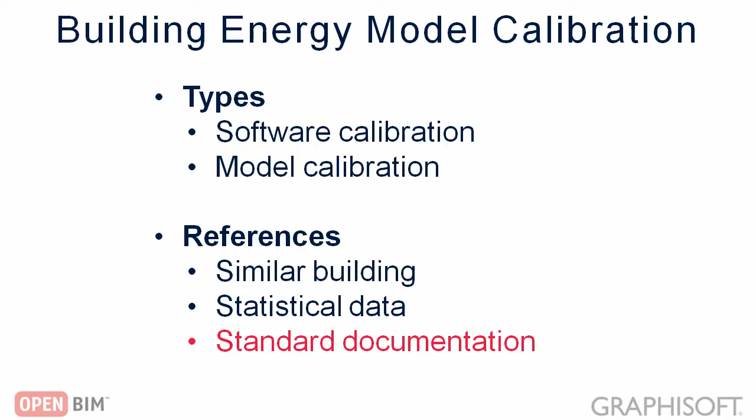A model from a building energy simulation standard can also be used as a reference building to perform the calibration of your design. In this presentation, we will use one of the ASHRAE 140 standard building models to show you how to calibrate a building energy model, as well as demonstrate that EcoDesigner Star complies with the ASHRAE 140 standard.

The official name of the ASHRAE 140 standard is Standard Method of Test for the Evaluation of Building Energy Analysis Computer Programs. This is the internationally accepted validation procedure for high-end building energy performance analysis software. ASHRAE 140 is referenced by all significant green building rating standards, for example LEED, Green Star, BREEAM, CASBEE, DGNB, and Section J of the Building Code of Australia.

The ASHRAE 140 standard documentation contains over 100 various cases, architectural tests called building envelope tests, and building system tests for various heating, cooling, and ventilation system setups. If a computer application can correctly simulate all ASHRAE 140 test cases and provide appropriate results, then these simulation results are approved as a basis for a building energy performance rating as prescribed by LEED, BREEAM, Green Star, and others.

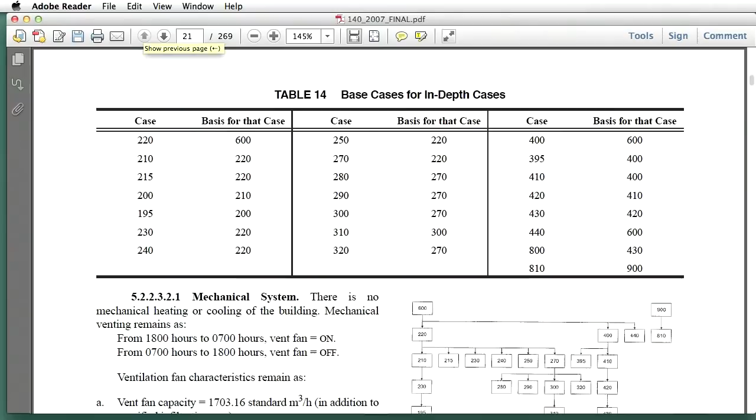All ASHRAE 140 test cases relate to one of the so-called base cases. For example, there are 2 envelope test base cases. These base cases are modified and listed as more complex subcases, which all originate from one of the base cases. All the energy scenarios described in the base cases, as well as in the subcases, must be properly simulated by the computer application in order to obtain approval and receive standard compliance certification.

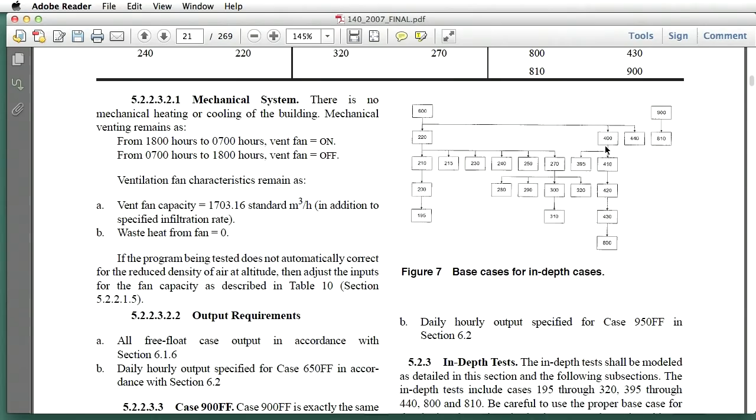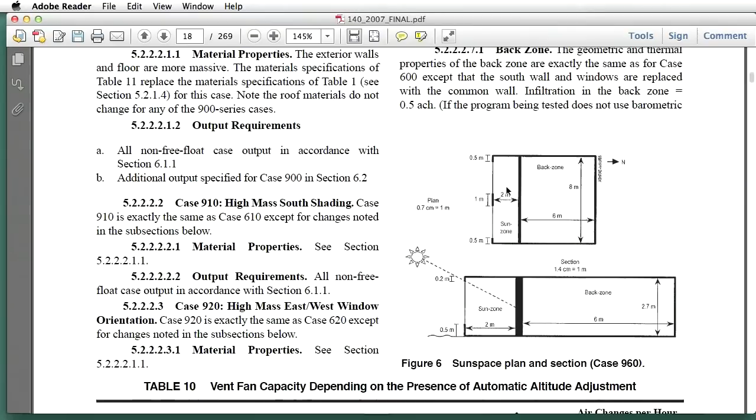In this example, we'll present one of the envelope tests of the ASHRAE 140 standard. This will be the so-called SunSpace test, and its case number is 960. Let's have a quick look at the description of this particular case first. The standard defines the detailed geometry of the building model on which the test must be run. Below, all the corresponding material properties are also listed in tables. In the case of the SunSpace test, 2 thermal blocks must be considered: a sun zone with a window and a back zone behind it.

The parameters defined in the ASHRAE 140 standard must be input into the software application precisely. After executing the energy simulation, the calculated results must meet the results defined in the standard. In the case of the SunSpace test, the following calculation results must be shown: total annual cooling and heating energy for the back zone, heating and cooling peak loads for the back zone, minimum, maximum, and annual mean temperatures in the sun zone. The back zone is a so-called conditioned space, and the sun zone is an unconditioned space. These terms will be explained shortly.

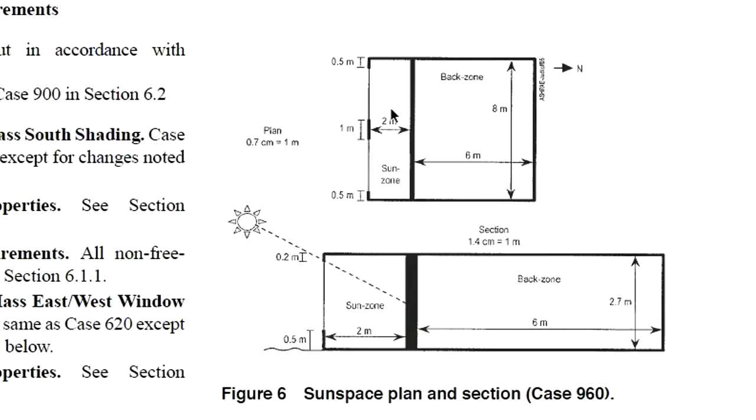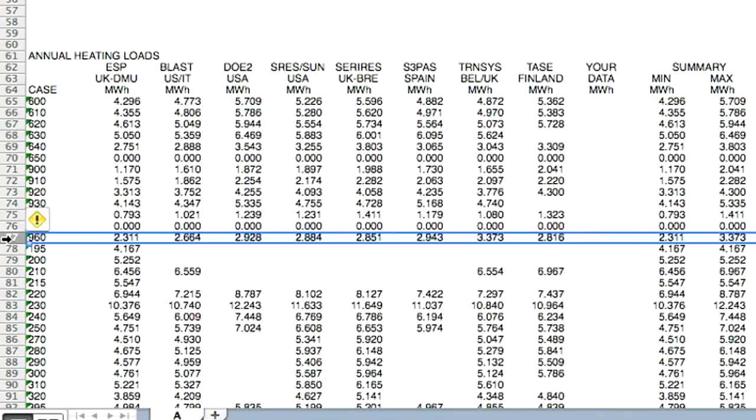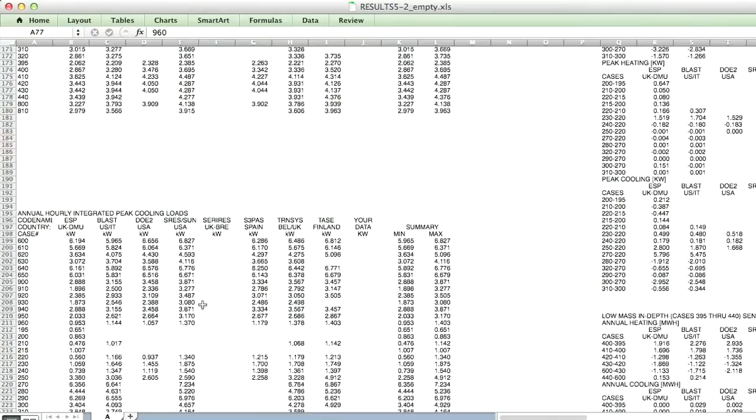The standard table contains the calculation results of other software applications for reference. The last 2 columns contain the minimum and maximum values as calculated by the other reference software. These 2 values define a range for the acceptable results. To be able to achieve standard compliance, the results calculated using the software application being tested must be within this range. There are additional tables for annual cooling loads, peak heating and cooling, and so on. All relevant calculation result data for each test case must be processed using the validation method described above.

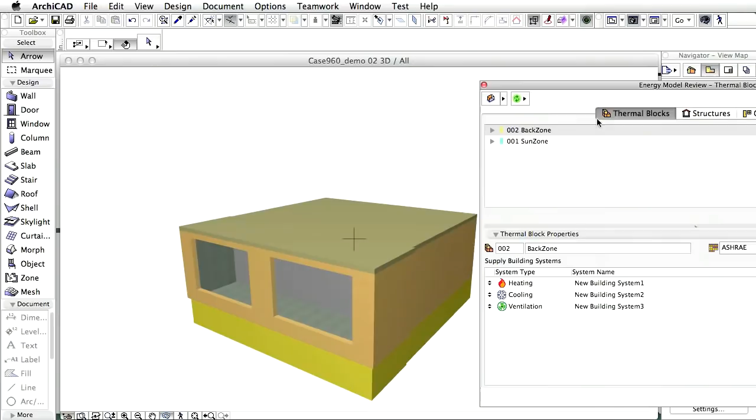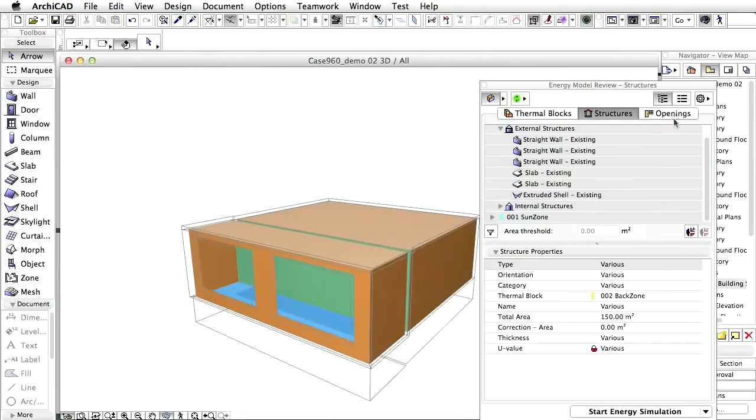Let's display the building model of case 960 of the ASHRAE 140 standard in ArchiCAD. The building model is pretty simple. It contains only 2 thermal blocks. The sun zone is a heavyweight construction, while the back zone is a lightweight structure. The Energy Model Review palette helps to visualize the 3D geometry, as well as all the energy-related characteristics of the building. The Thermal Blocks page of the palette represents the zoning of the energy model. The Structures page lists all the opaque structural elements with their relevant properties. The Openings page presents the energy-related characteristics of the fenestration.

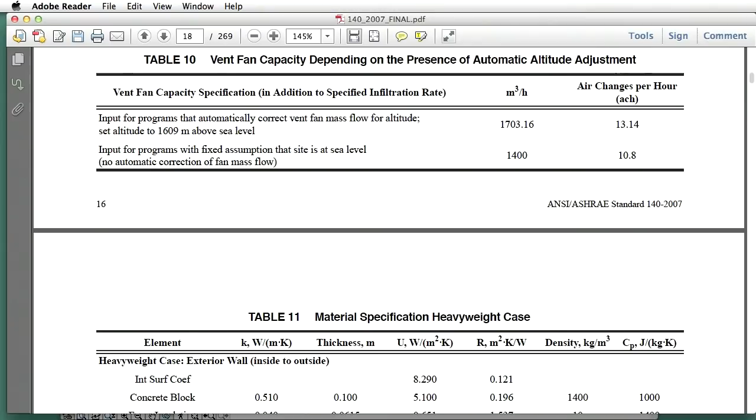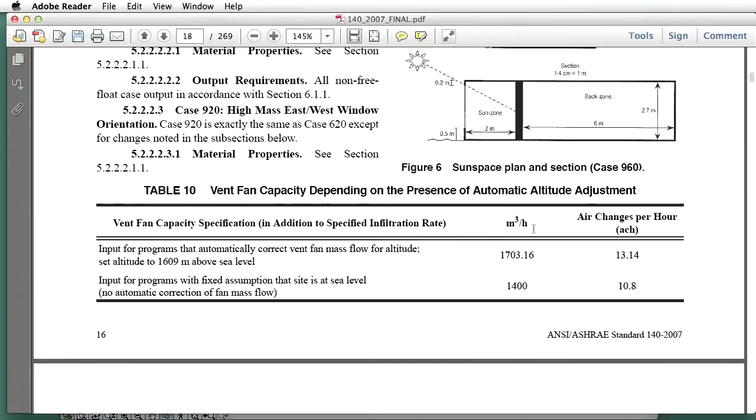Let's have a closer look at the specifications of the sun zone as defined by the ASHRAE 140 standard. Here you can see the geometry of the zone, while the following page describes the various structures' thermal properties. The names of the individual skins of the composite structural elements with their thickness, thermal conductivity, heat capacity, and density are all precisely defined in the standard. Using the advanced modeling tools of ArchiCAD, it was really quick and easy to create the building model according to the ASHRAE 140 standard specifications.

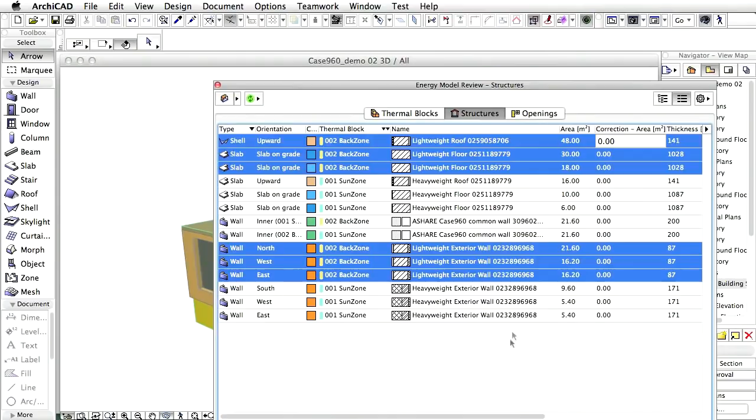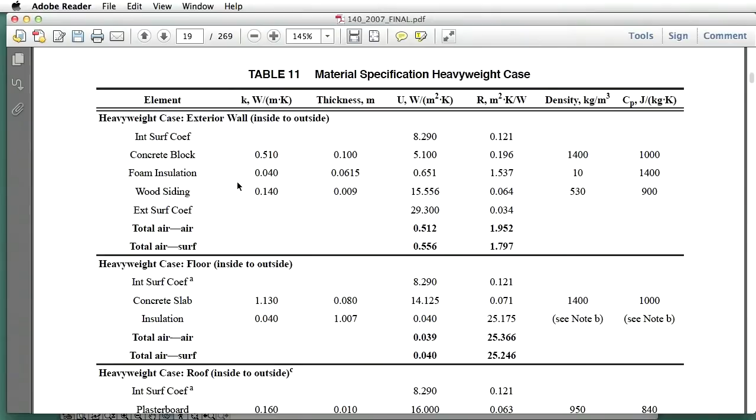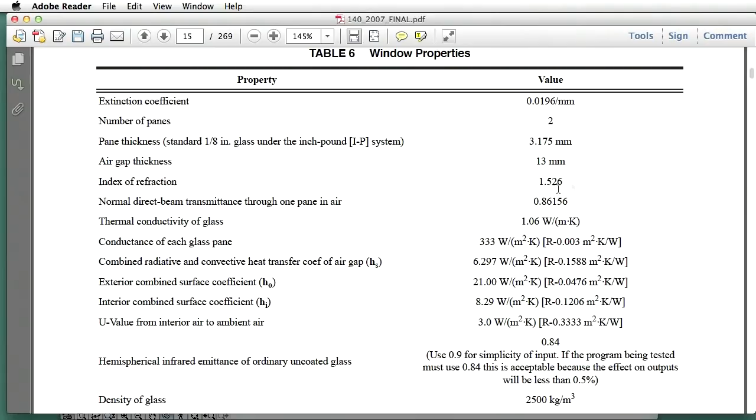Here you can see the structures list of the Energy Model Review palette. It lists all the composite structures used in this test case with the relevant properties of their skins. The thickness, thermal conductivity, heat capacity, and density of the skins of this external wall, for example, exactly match the values defined by the ASHRAE 140 standard. The openings characteristics are also precisely described in the standard. Switch to the openings page of the Energy Model Review palette of EcoDesigner Star to see all the input parameters the program uses to describe the fenestration in test case 960. We can use the openings page to scroll, rearrange, filter, and sort all the relevant properties of the openings.

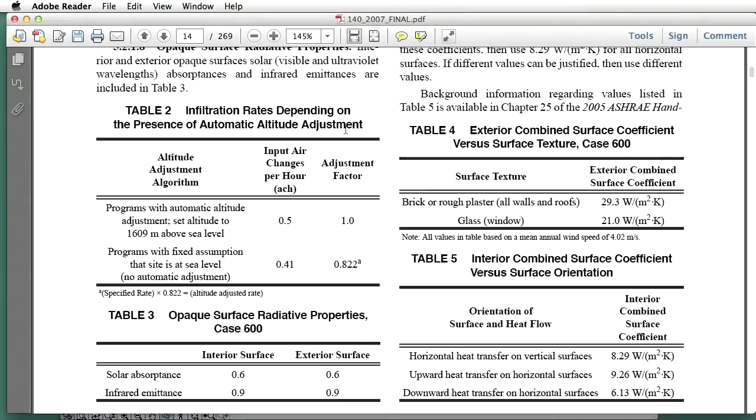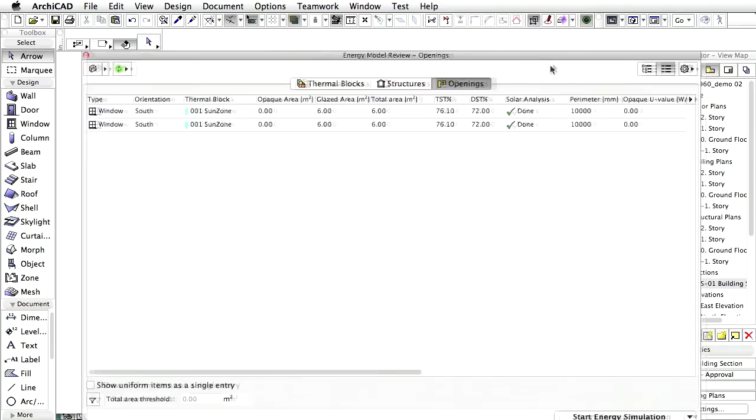Let's have a look at the infiltration rate prescribed in the ASHRAE 140 standard. The air change per hour is defined as 0.5, a constant value for both thermal blocks. In EcoDesigner Star, however, the infiltration model is pressure-driven. In other words, it's not constant. To model constant infiltration with EcoDesigner Star, we must define it as natural ventilation. We've set a natural airflow at a steady 0.5 ACH rate for the entire year. This way, we fully meet the simplified, constant infiltration modeling requirements of Case 960 of the ASHRAE 140 standard.

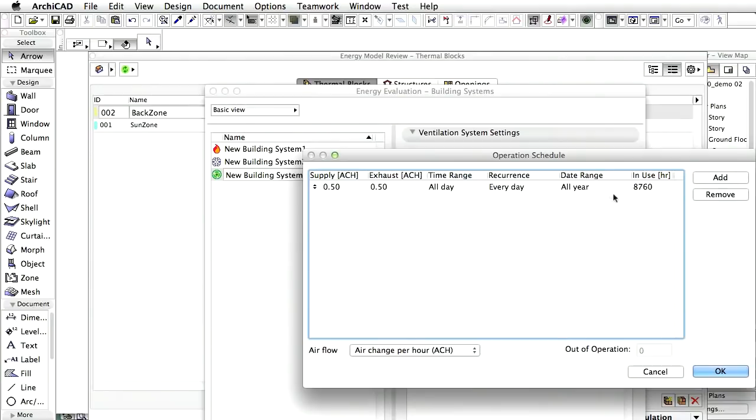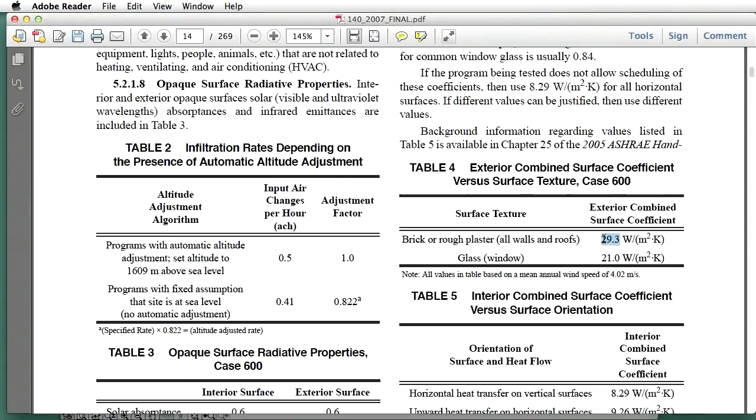Proceed by having a closer look at the external and internal surface coefficient settings for the individual structures as well as for the overall building energy model. Use the U-value calculator dialog to enter the combined surface heat transfer coefficients for the steady-state calculation of the structure's U-values.

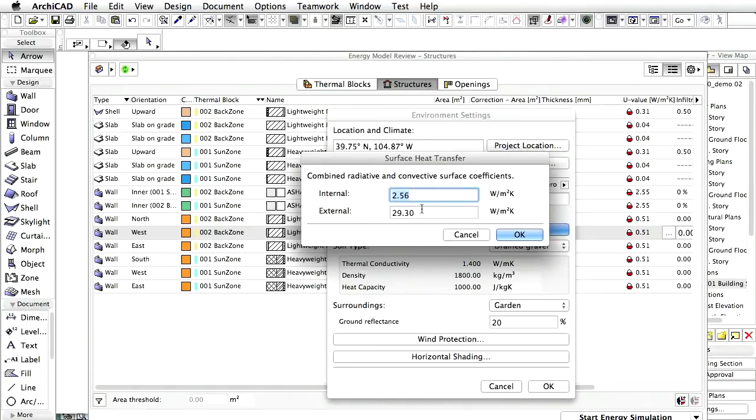In addition, enter the external combined and internal convective surface heat transfer coefficients for the dynamic energy simulation via the surface heat transfer dialog of the Environment Settings panel.

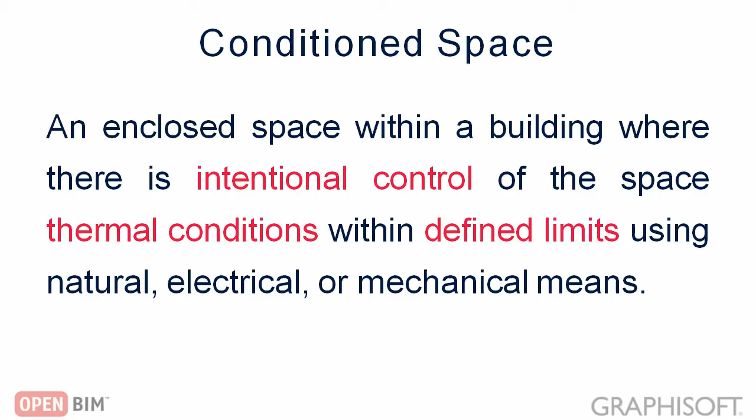Let's continue and have a closer look at the operation profile of the back zone, which is a so-called conditioned space. By definition, a conditioned space is an enclosed space within a building where there's intentional control of the internal temperature. It's maintained within a temperature range defined by limit temperatures, using natural, electrical, or mechanical means. In layman's terms, this means that there are certain internal temperature requirements for the thermal blocks that must be met with the help of heating and/or cooling systems. In the case of an unconditioned space, the internal temperature is not controlled.

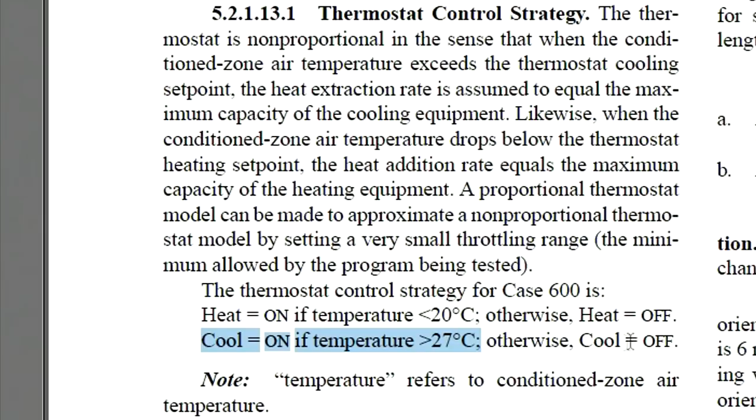Let's view the operational profile in EcoDesigner Star that contains the internal temperature limits for the back zone. Display the Operational Profiles dialog and select the ASHRAE profile from the list. Let's open the Daily Profile Editor dialog to have a closer look at the daily profile settings. The upper diagram can be used to define the maximum and minimum limit temperatures beyond which heating or cooling must be used for every hour of the day. The daily profiles defined with this editor must then be assigned to the days of the reference year.

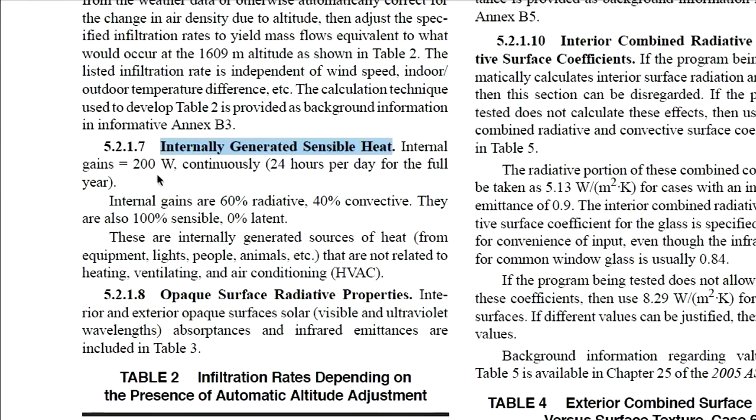Let's also review the constant internal heat gain requirement prescribed by the ASHRAE 140 standard for test case number 960 as internally generated sensible heat. It's defined to be a continuous 200 watts throughout the entire year, 60% of which is radiative, 40% convective, and 100% sensible. Let's see how to set these parameters in EcoDesigner Star.

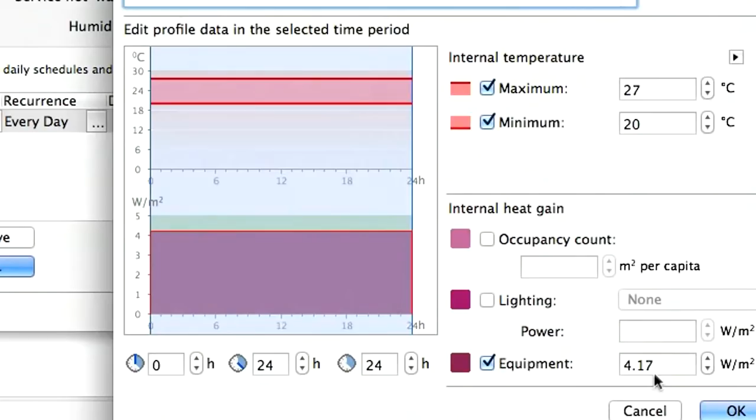Open the Daily Profile Editor once again, and view the lower diagram representing the characteristics of internal heat gain. Checkmark the equipment option, and enter 4.17 watts per square meter for every hour of the reference day. Then use the Operational Profiles dialog to assign this daily profile to every day of the calculation year. If 4.17 watts per square meter is multiplied with the 48 square meter conditioned area, then the result is a steady 200 watts of internal heat gain throughout the entire reference year as prescribed by the standard.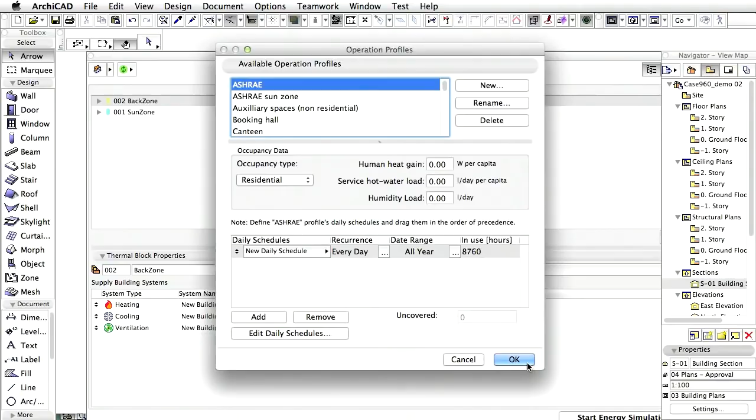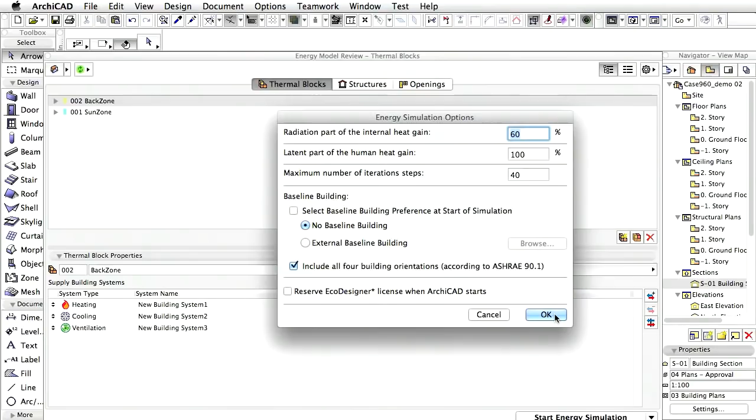As the last step of setting the input parameters for the internal heat gain calculation, open the Energy Simulation Options dialog and enter 60% for the radiation part of the internal heat gain to precisely match the standard prescription. Note, the Energy Simulation Options dialog of EcoDesigner Star is also used to define the latent part of the human heat gain. It is set to 0 for case 960.

Let's proceed and see how to run the building energy simulation, this time in demand calculation mode. Let's open the Building Systems dialog. Please note that a heating and cooling system is already created and added to the back zone. Define these systems as not yet specified, in which case there is no need to define any additional system parameters. In order to determine the heating and cooling demands, we must make EcoDesigner Star carry out the energy simulation assuming that the heating and cooling systems are capable of satisfying all the requirements with 100% efficiency.

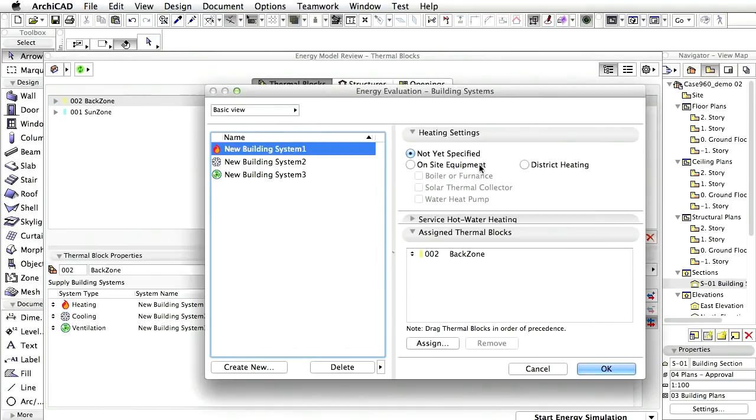The building system type in EcoDesigner Star defined for demand calculation is called Not Yet Specified. Not yet specified building systems fulfill all heating or cooling demands as they arrive during the hourly building energy simulation throughout the entire reference year. The calculated hourly heating and cooling demands are recorded by the program and displayed on the building energy evaluation reports. This demand calculation output can be used to determine the actual building system's characteristics. To set up the demand calculation, assign these not yet specified building systems to the thermal zones. Note, EcoDesigner Star is capable of modeling building systems in a very detailed way. Case 960 of the ASHRAE 140 standard, however, only requires demand calculation.

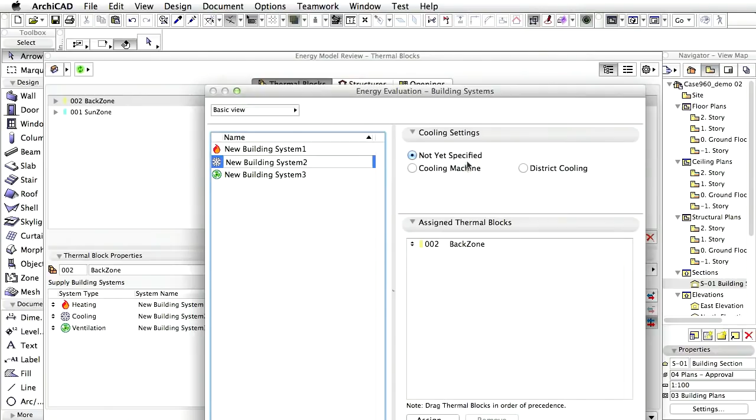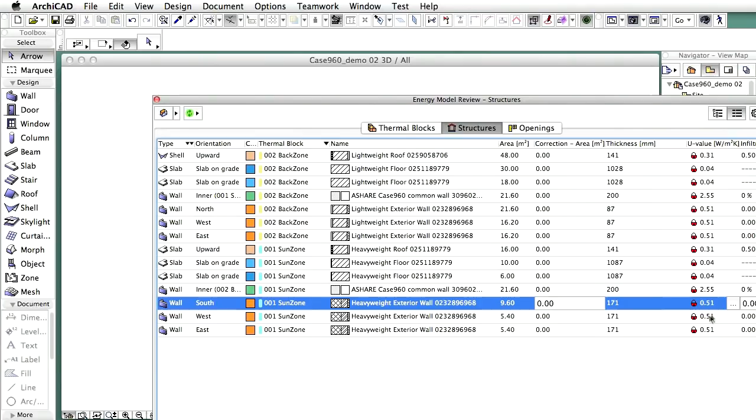Let's take a look at the characteristics of the sun zone. It has 2 windows and a common wall with the back zone. The geometry, material specifications, and additional relevant properties of the sun zone were input into EcoDesigner Star in accordance with the ASHRAE 140 standard. A workflow similar to this was explained earlier in detail as part of the presentation of the back zone's characteristics. For example, you can see the opaque building energy model element's relevant characteristics displayed on the Structures page of the Energy Model Review palette.

Let's take a closer look at the operation profile of the sun zone. This thermal block is a so-called unconditioned space. By definition, an unconditioned space is an enclosed space within a building that does not meet the requirements of a conditioned space. These spaces have no control over thermal conditions, but receive thermal energy from adjacent spaces.

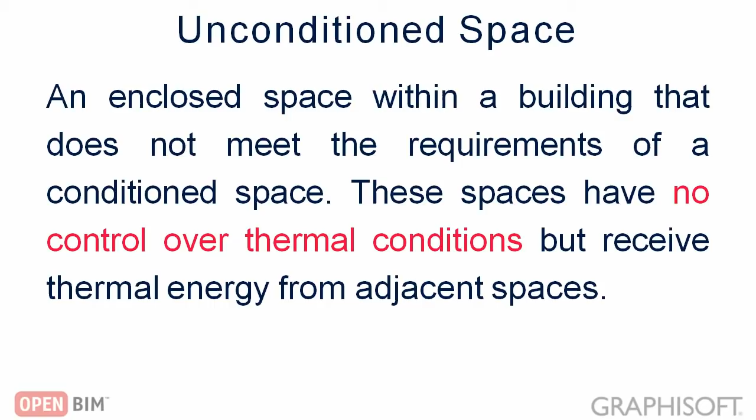In other words, these spaces do not have any building system assigned to them that would regulate the internal temperature. Without any minimum or maximum limits defined, internal temperature changes without constraints. This phenomenon is called free-float internal temperature. Let's see how to specify an unconditioned space in EcoDesigner Star.

Here you can see the previously created ASHRAE Sun Zone operation profile. From the Daily Profile Editor, we can see that there are no maximum or minimum temperature limits defined for this operation profile. Naturally, no building systems are assigned to the unconditioned spaces either. There are no internal heat gains in the sun zone of case 960, but the previously discussed steady airflow is added to it to represent the infiltration defined in the ASHRAE 140 standard for this test case.

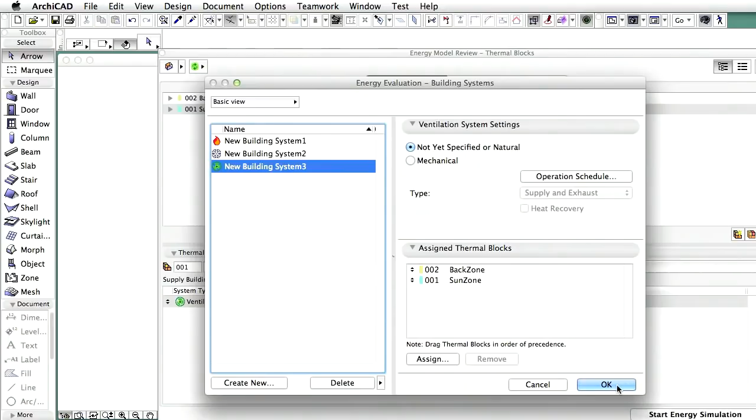So now let's run the building energy simulation by pressing the Start Energy Simulation button. It takes a couple of seconds to complete the calculation, and the results are displayed on the screen. The next step is to specify the chapters we wish to include in the Building Energy Evaluation PDF report. We can select the required chapters on the left under the Report Chapters page of the dialog.

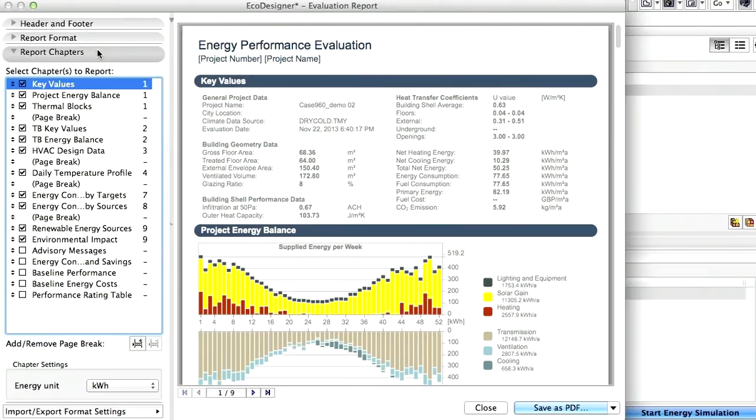In case 960, since only the energy demand calculation is required by the ASHRAE 140 standard, many of the chapters, for example fuel consumption, performance rating, etc., do not apply and therefore should not be included in the documentation of the test case. Let's go through the chapters that are relevant for our example one by one. First, select chapters that contain project-level results. Checkmark the Key Values and the Project Energy Balance chapters. Then scroll down to select the Thermal Blocks chapter as well.

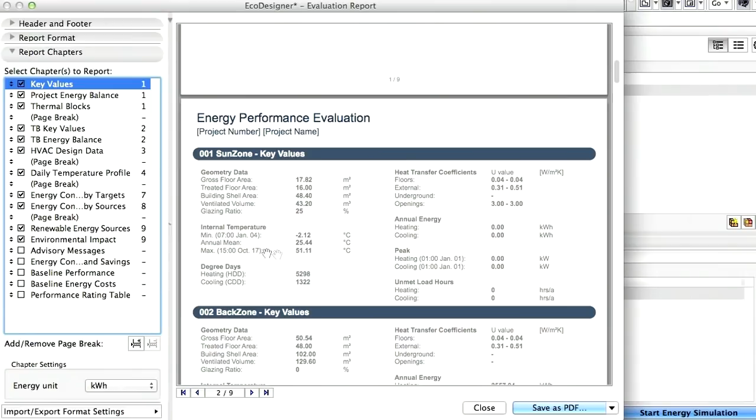Secondly, select chapters that contain thermal block level results. The Thermal Block Energy Balance and Thermal Block Key Values chapters display important energy performance and comfort data, such as total annual energy flows, peak demands, as well as annual internal temperature averages and extremes.

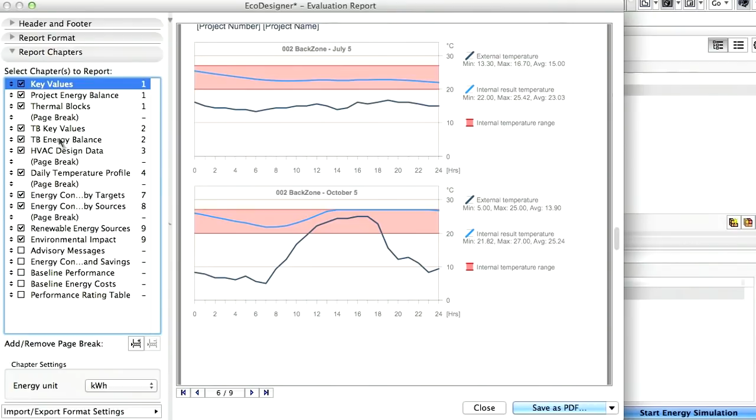The Daily Temperature Profile chapter displays the hourly temperatures inside the selected thermal block on any selected day of the calculation reference year. There are different diagrams for the different thermal zones and days, any of which can be selected for documentation. Use the Chapter Settings panel to select the thermal block and the day of the year. The corresponding internal temperature profile instantly appears among the chapters to be documented on the preview area on the right side of the evaluation report dialog.

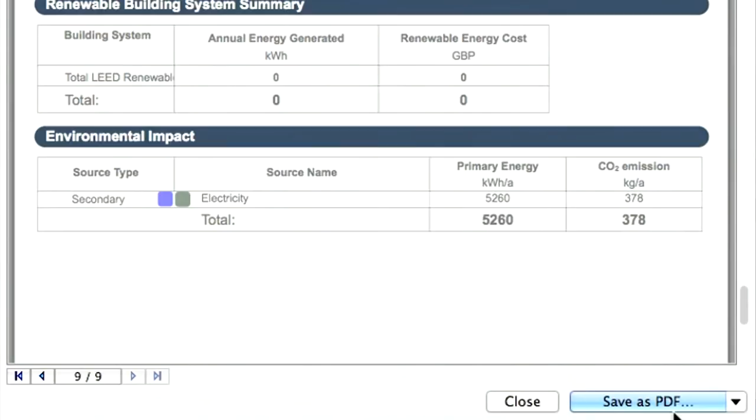Although no specified building systems were used for the demand calculation in this example, it's a good idea to also include the energy consumption by targets and energy consumption by sources chapters in the report, since these chapters provide information about the quality of the building energy model and simulation data processing. Let's proceed and save the report as a PDF document by selecting the Save as PDF button in the lower right corner of the Evaluation Report dialog.

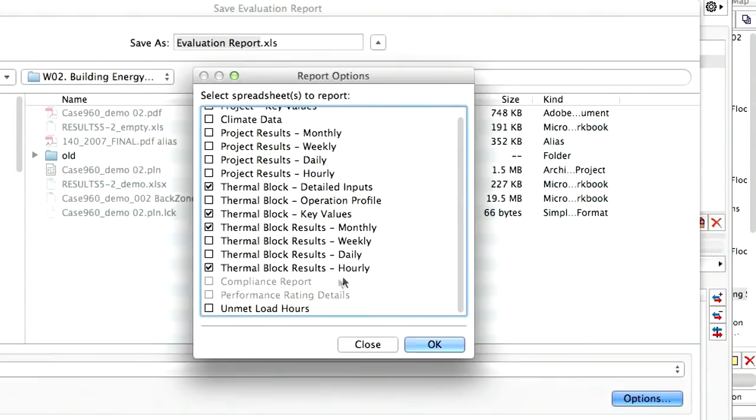Let's customize and then save an Excel spreadsheet report as well. The report in Excel spreadsheet format provides a more detailed breakdown of energy analysis input and output data that can be easily post-processed. Similarly to how the content of the PDF Energy Evaluation Report can be customized, it's also possible to specify the chapters we wish to include in the Excel spreadsheet report. This time, let's select the thermal block's detailed inputs, thermal block key values, and the monthly and hourly thermal block results for the documentation, then click OK to save the spreadsheet.

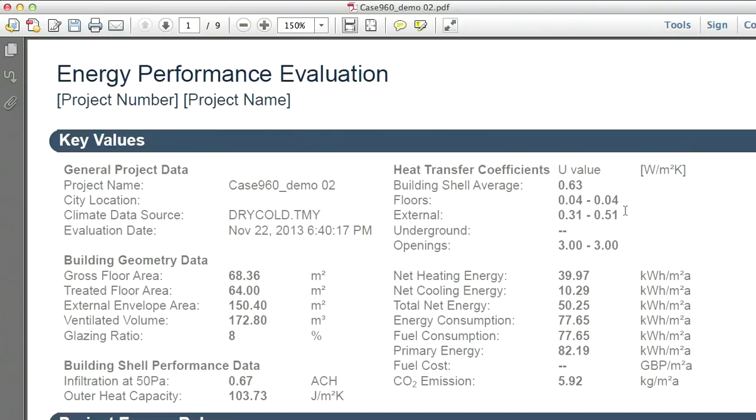Use the previously created PDF evaluation report to review the energy simulation results chapter by chapter. Looking at the Project Key Values chapter, we see basic structure geometry and performance information displayed on the right. Please note that the dedicated ASHRAE 140 climate data file was used for this simulation. The project energy balance displays the sum of all the individual thermal block energy balances.

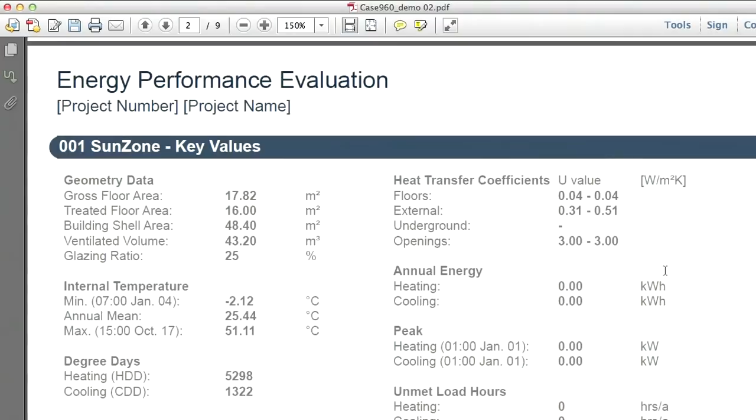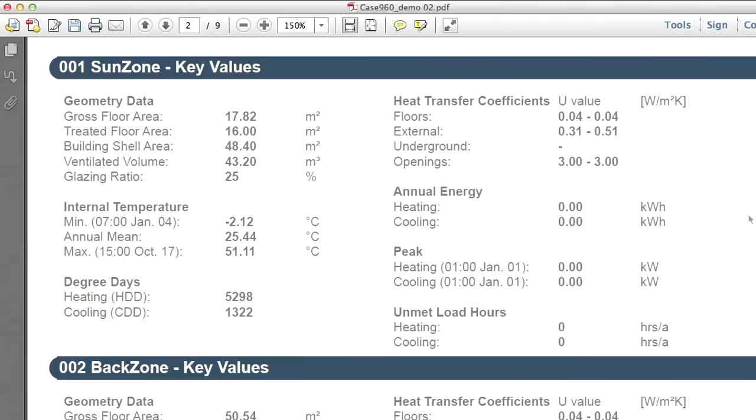The thermal block key values are also part of the evaluation report. Let's see the key values of the unconditioned sun zone first. In the case of the sun zone, the internal temperature data on the left side of the sun zone key values chapter is the most important. Then scroll down to display the key values of the conditioned back zone as well. For the conditioned back zone, the annual heating and cooling energy values are the data we are after, and they're displayed on the right side of the back zone key values chapter.

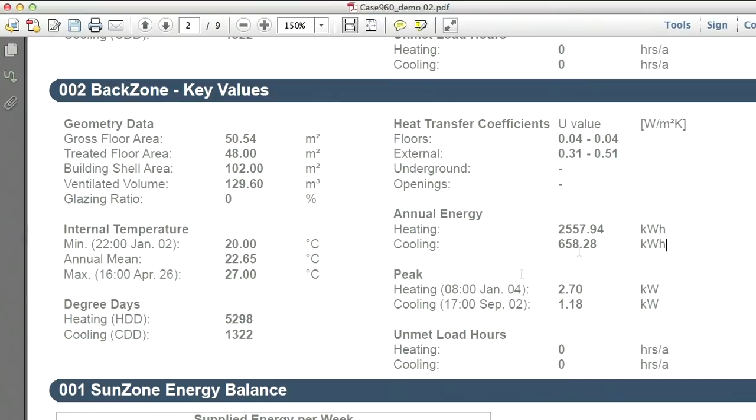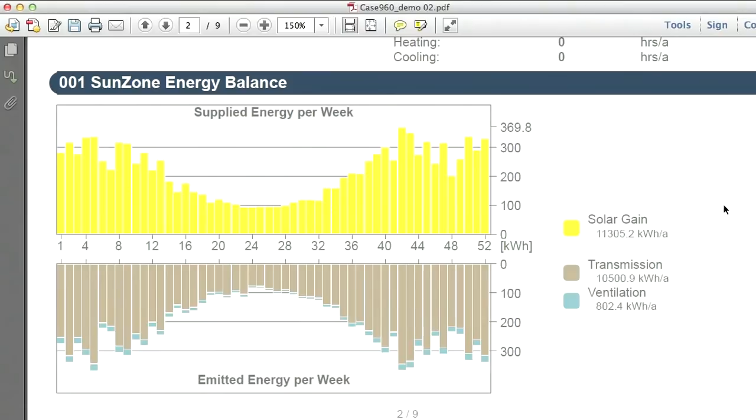Let's see the thermal block energy balances next. On the energy balance diagram of the unconditioned sun zone, the solar gain in yellow is counterbalanced only by the transmission and the airflow displayed in brown and blue respectively. On the energy balance of the conditioned back zone, the heating demands appear in red on the supply or top side of the diagram, while the cooling demands are shown in the darker greenish blue as emitted energy on the bottom side of the energy balance diagram.

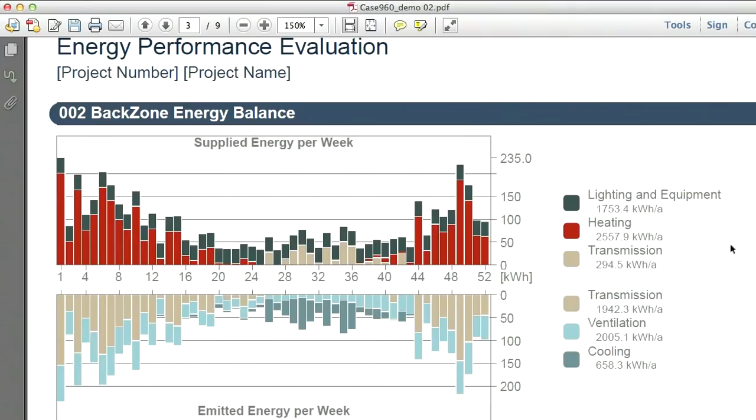The HVAC design data table contains very important demand calculation output. It displays the annual and peak heating and cooling loads of the conditioned thermal block or back zone. This building system sizing data is necessary for energy modeling and for HVAC design alike.

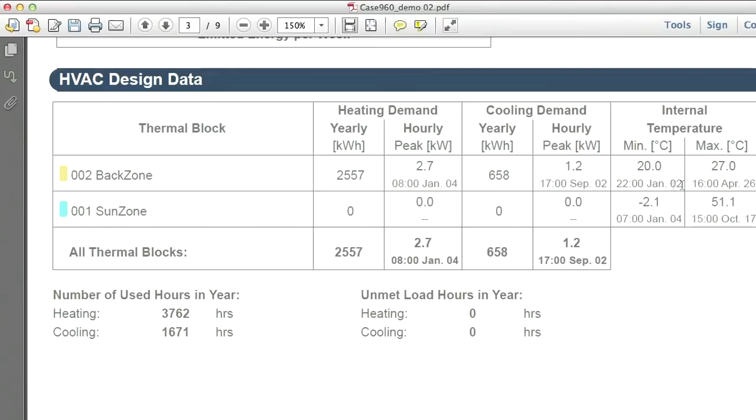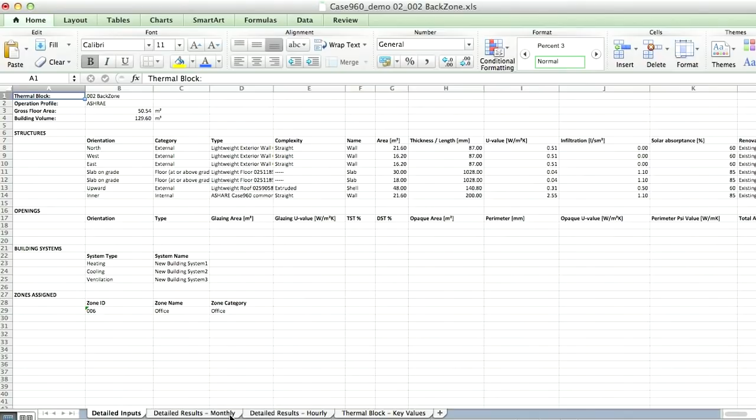Let's also review the detailed simulation data presented by the Excel spreadsheet evaluation reports. Based on the custom report content specified by the user, a project data Excel spreadsheet is generated alongside the separate spreadsheets dedicated to each thermal block. The first page of the thermal block result data spreadsheets is the detailed inputs page. Let's open the second page, which contains the detailed monthly results.

The annual heating and cooling loads are displayed here. Annually, 2,558 kilowatt hours are required for heating, and 658 kilowatt hours are required for cooling for the back zone in the example project.

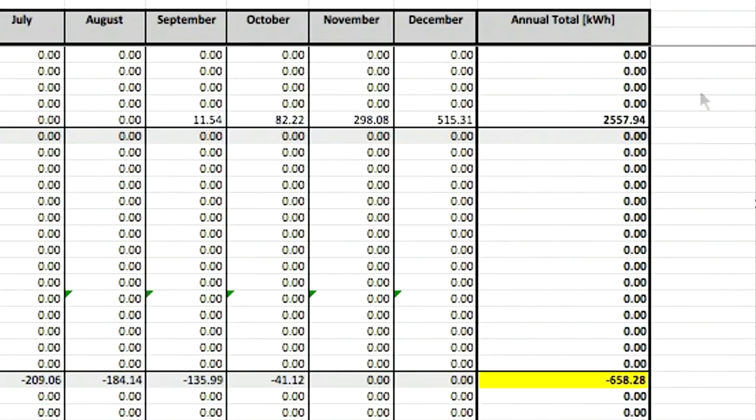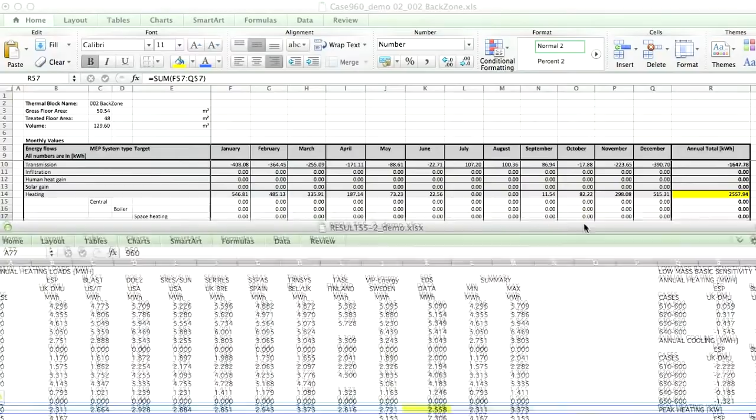For the next step, let's use the spreadsheet of the ASHRAE 140 standard that contains the reference simulation results. This is a copy of the Excel file that was presented at the beginning of this movie. Besides the standard's reference values, this sheet now also includes the EcoDesigner Star calculation results for all the ASHRAE 140 test cases. The test case we investigated, number 960, is now highlighted on the screen.

Our calculated annual heating load was 2.56 megawatt hours for the back zone. As you can see, the standard reference result range is between 2.3 and 3.3 megawatt hours. This means that the calculation performed by EcoDesigner Star is within the acceptable range defined by the ASHRAE 140 standard.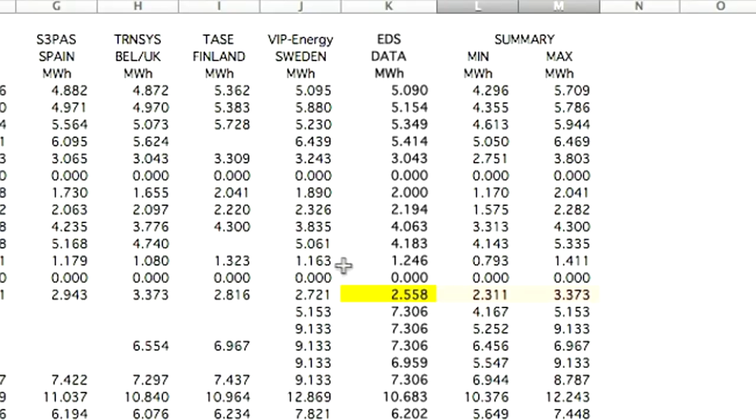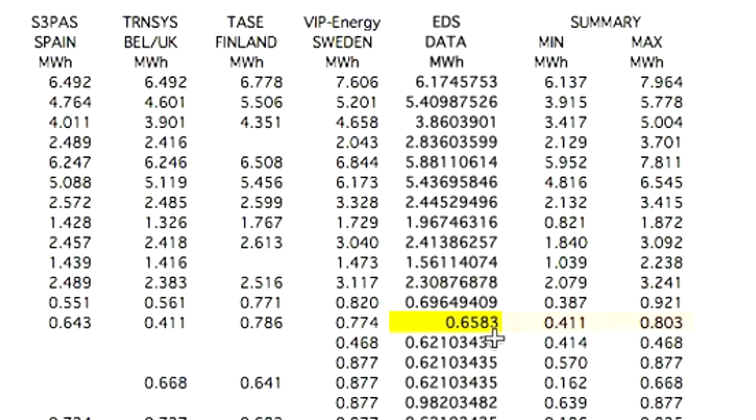Let's look at the annual cooling load as well. The EcoDesigner calculation result is 0.66 megawatt hours. The acceptable range prescribed by the standard is between 0.41 and 0.8 megawatt hours for case 960, so the EcoDesigner Star calculation result meets the ASHRAE 140 standard requirements.

Let's proceed to validate the peak cooling load and peak heating load calculation results. Display the thermal block key values page for the calculated annual hourly integrated peak heating load, which is 2.7 kilowatts. The annual integrated peak sensible cooling load, according to the EcoDesigner energy simulation results, is 1.18 kilowatts.

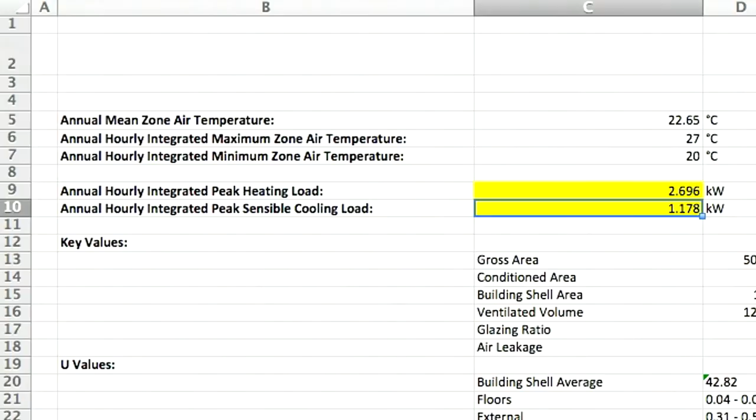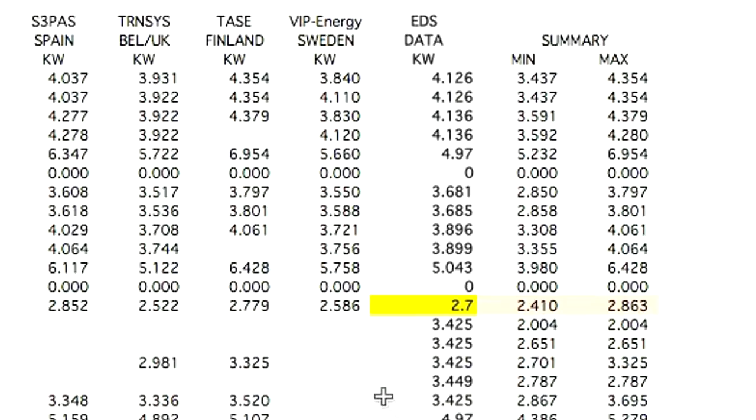Let's compare these values with the results provided by the standard. The peak heating load must be between 2.4 and 2.8 kilowatts. So the EcoDesigner Star calculation is yet again in the acceptable range. Same applies for the peak cooling load, which must be between 0.9 and 1.4 kilowatts.

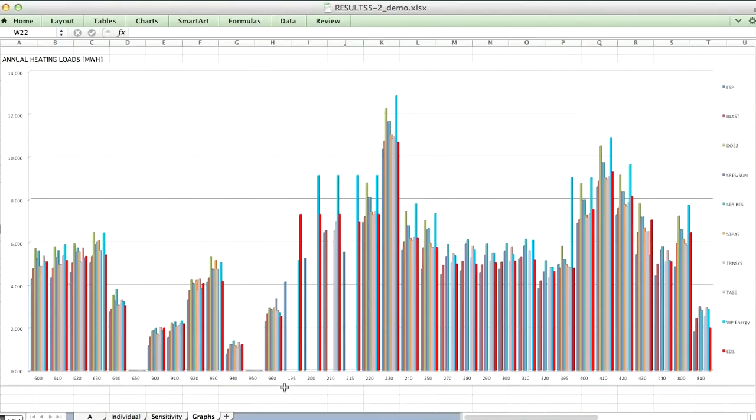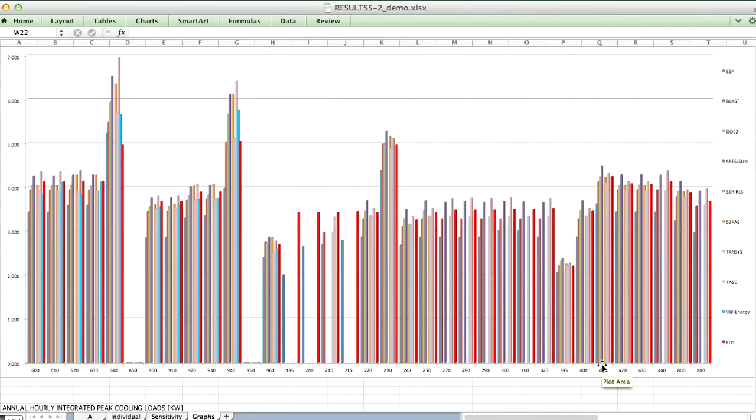Please note that EcoDesigner Star is the only software solution native to the architectural design environment. All other dynamic building energy analysis software solutions are third-party applications developed for energy modeling professionals and engineers. EcoDesigner Star is the first architectural BIM software tool capable of producing calculation results that match the accuracy of high-end building energy modeling software solutions.

These graphs show the results of the other ASHRAE 140 building envelope test cases. You can see that EcoDesigner Star, represented in red, is capable of producing results that are just as accurate as the standard reference results generated with other high-end building energy analysis software applications.

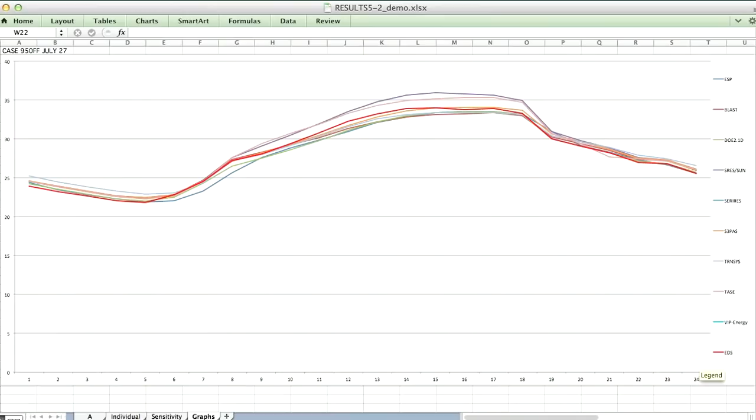Let's summarize what you've seen today regarding building energy model calibration. We started by obtaining the energy performance documentation of the reference building. The reference documentation in our example is an ASHRAE 140 standard test case. As the next step, we created a building with ArchiCAD and assessed the building's energy-related characteristics using EcoDesigner Star. We then ran the energy simulation and compared the calculated results with the reference results documented in the ASHRAE 140 standard.

Graphisoft EcoDesigner Star is capable of analyzing multiple thermal block building energy models and modeling conditioned and unconditioned spaces. EcoDesigner Star complies with the ASHRAE 140 standard method of test for the evaluation of building energy analysis computer programs. This standard is used for validating energy simulation software. Compliance with this standard ensures that EcoDesigner Star can be used to perform complex dynamic building energy analyses successfully, and that EcoDesigner Star produces results that are accurate enough for energy performance rating according to LEED, Green Star, and other relevant green building standards.

Please remember, it's only possible to generate accurate building energy evaluation reports with a standard compliant software solution such as EcoDesigner Star. However, using a compliant solution alone cannot guarantee that your calculation results will also be accurate. The accuracy of the reports greatly depends on the quality and accuracy of the input data you provide when you create the building energy model. Therefore, in order to make sure that your energy-related design input and output is correct and precise, please calibrate each BEM carefully using reliable reference data.